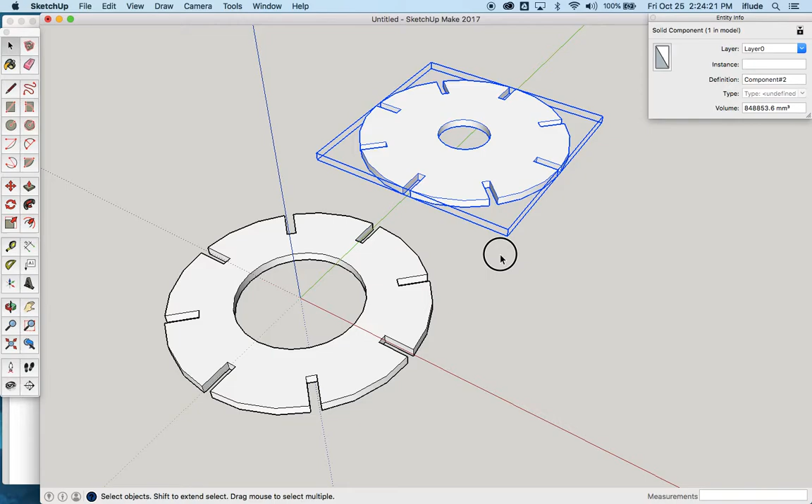I'm going to hide these guys so I can make the next thing I need, which according to the guidebook is these two legs. They're pretty simple rectangles with some slots cut out of them. If you're sharp-eyed, you'll notice the height and every dimension of this one is identical to this one, except for this little bit sticking out the bottom.

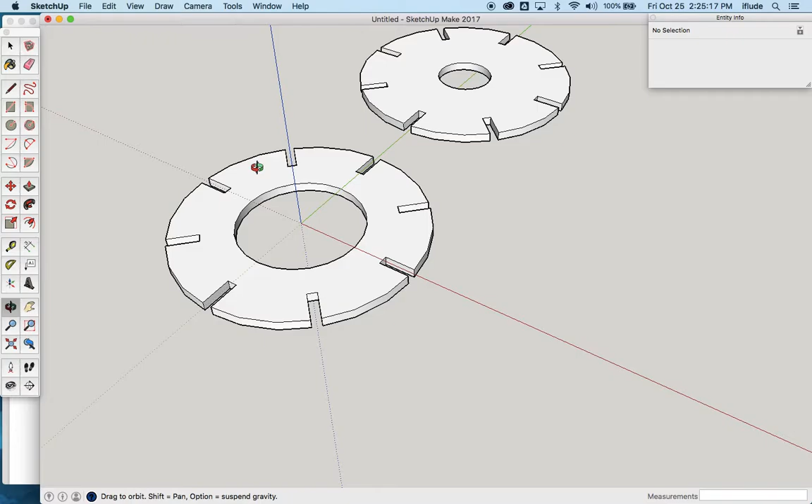So I'm going to start by drawing this — you can see it's a rectangle of 400 by 90. Let's do that first. Actually, I'm going to unhide those two circles until I get my view into this orientation. You'll see why in a moment. Now I'm going to re-hide them.

Edit, hide — the reason I got my view into this orientation is that it makes it easier to make a standing-up rectangle rather than a laying-down one. Let me double check the size: 400 by 90, right? So 90, 400 gives me my base rectangle for this shape.

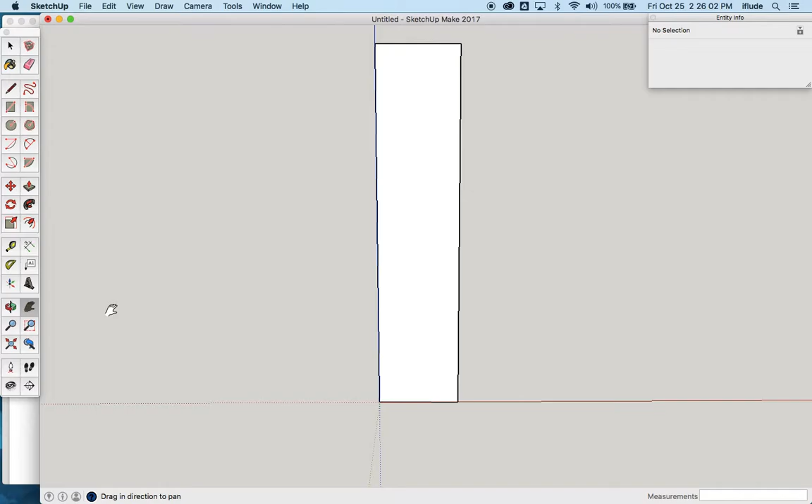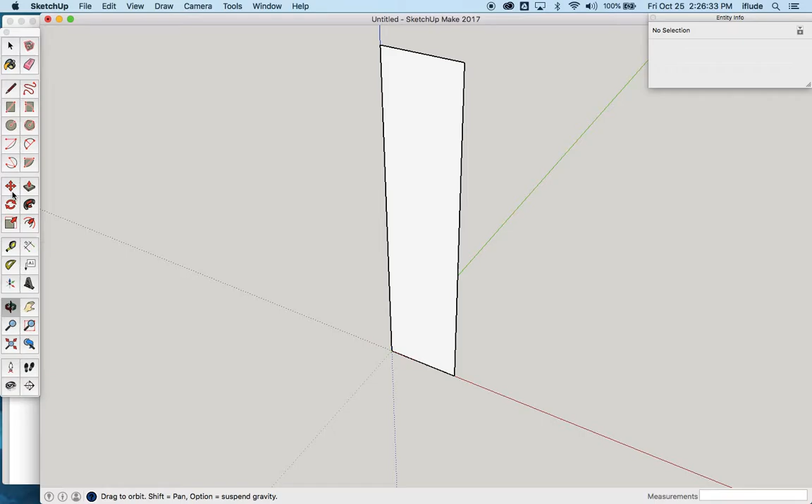So 25 from the top — I'm going to take my 25 from the top and 12 beyond that, and in by 40. Then we have 20 from the bottom, and then 12 again as the thickness, which is that.

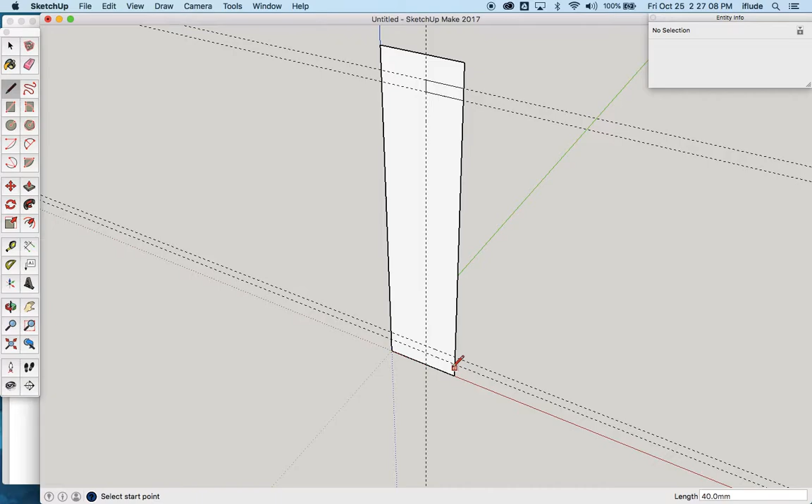That allows us to go in with our pencil tool, draw the shapes, carefully making sure we snap onto the intersections so we're doing it super accurately, and then by selecting right to left, so it selects anything it touches, I can delete the parts I don't need. All right, good to go.

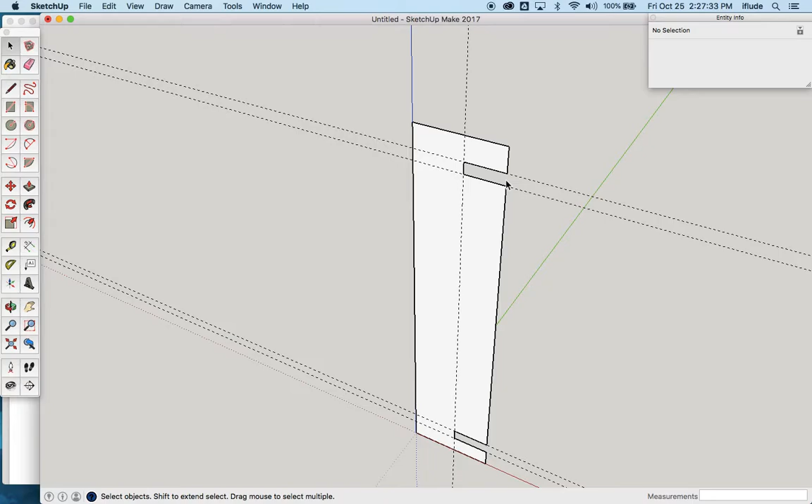Now, going back to the drawing, you can see the thickness of these isn't specified, but you can work it out by noting that the width of this slot is 12. Knowing this has to slot into that slot, you can tell the thickness is going to be 12.

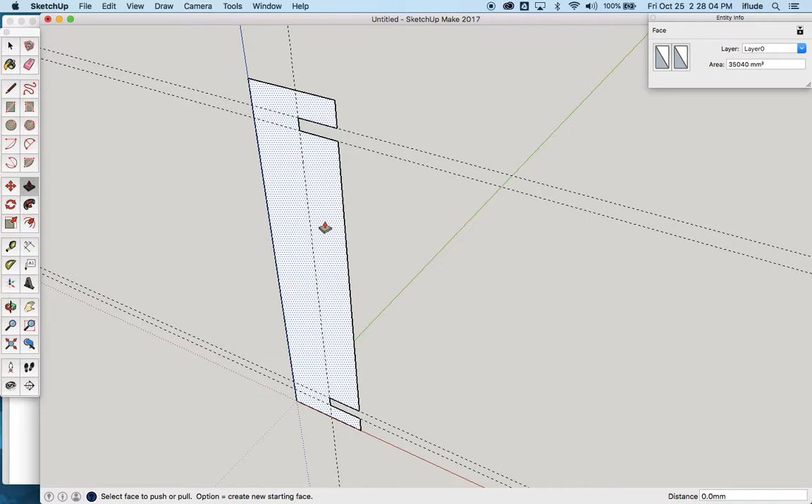So let's go back to SketchUp, take the push-pull tool, and make that 12 thick. And there we have it. Now's the time to make that into a component. And there we go.

Now, if you remember a minute or two ago, we noted that this is identical to that, other than the fact that we have this triangular leg area at the bottom of this one. We've got a little straight part of 18 before it angles up to meet at that bottom corner. That's a really easy thing to adjust on our already-made piece.

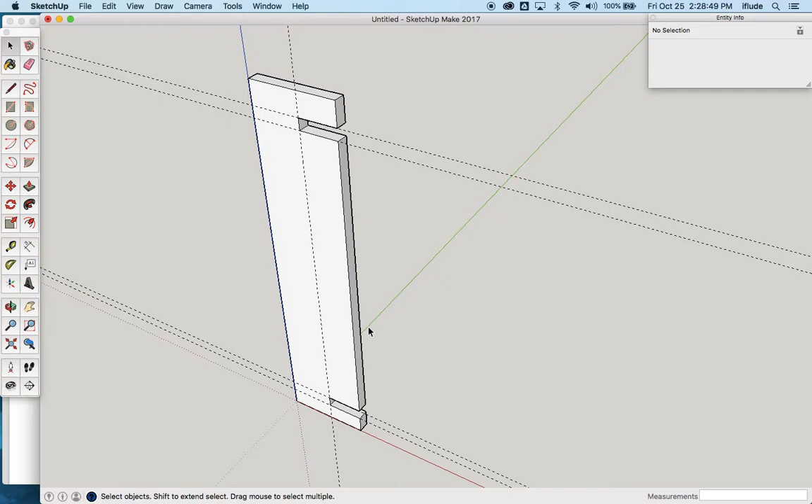So I'm going to make myself a copy of the component by hitting the Option key when I move it. Just move it up the green axis a little ways there.

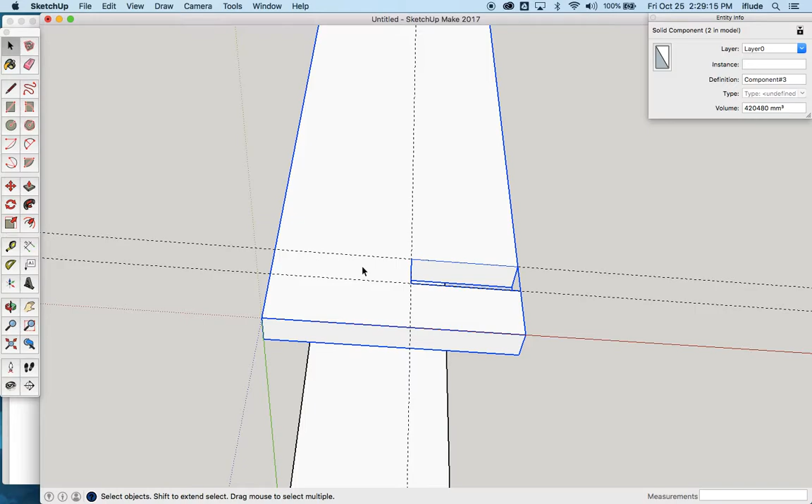I only want one of these to change — I want two different versions. I want this one to be the one with the leg, and I want this one to remain as it is. So I'll hold down Control and make this one unique, meaning when I edit this component, this one won't be changed. Go into edit mode, double click, and I want a little foot here of 18 and then that angled down.

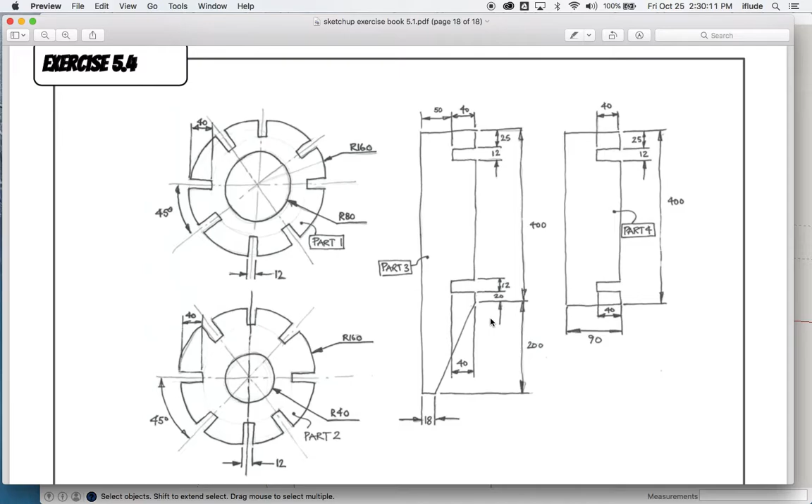So I'm going to select this edge, take my move tool, hit the Option key — or Control if you're on a PC — and move that in by 18 millimeters. If you watched one of my previous videos, you'll know that using the move tool I can make this shape really easily, so I'm going to move that selected area down by 200.

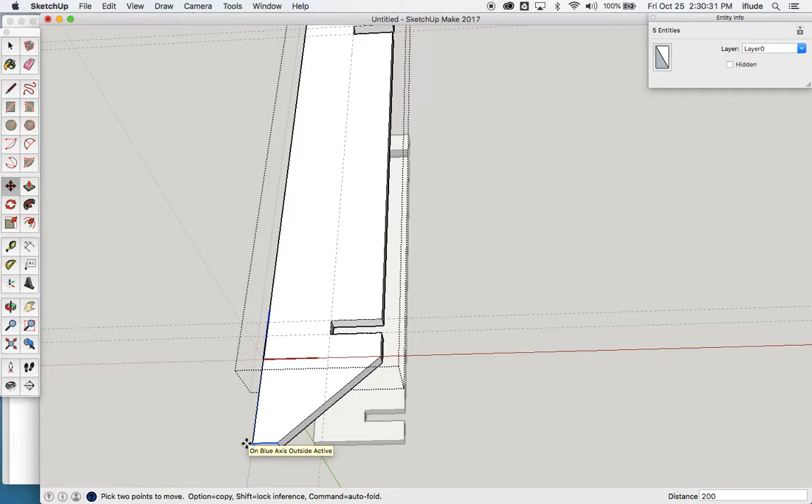Making sure I'm moving directly down — I know that because it tells me I'm moving on the blue axis. Type 200, and there you see I have the distance I need. Get rid of those unwanted guidelines that we don't need, and there I have the two...

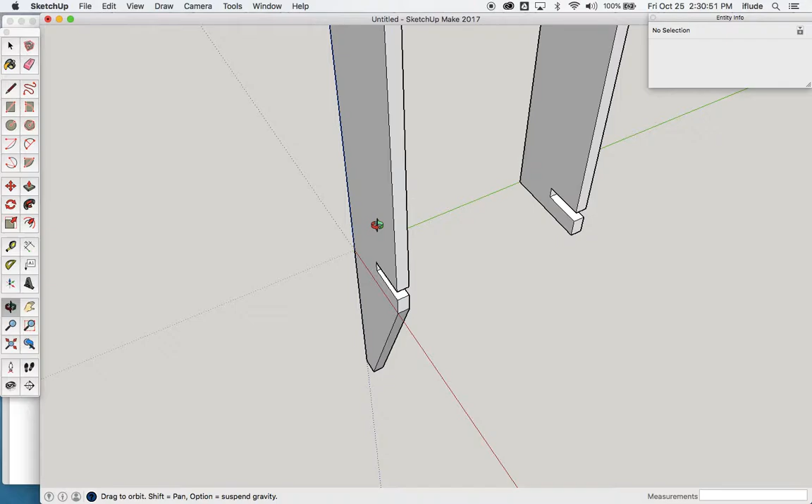Rectangular pieces. So let's go back and unhide the two circles. The only thing we need to do in the next video is put the whole thing together.